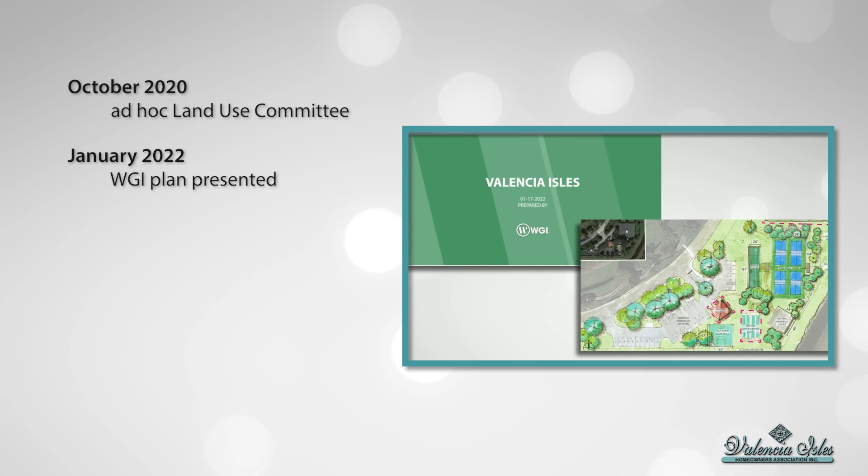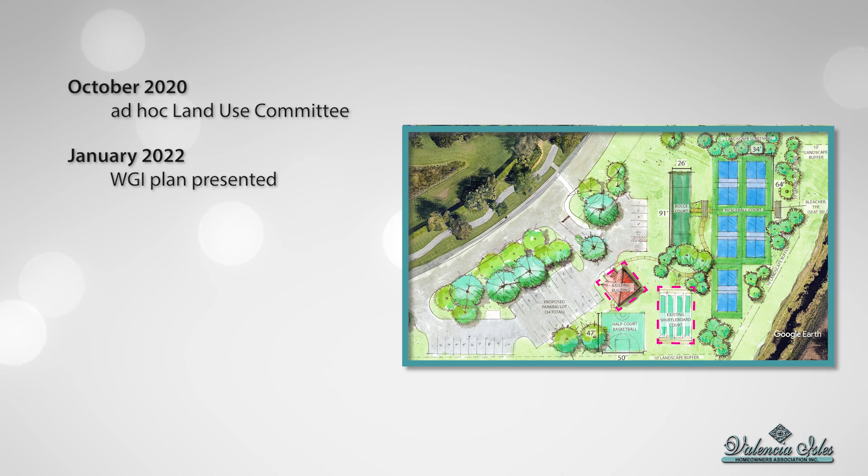It was an ambitious plan that included 6 pickleball courts, 2 bocce courts, a half-court basketball court, additional lighting, and increased parking. The project was estimated to cost no more than $700,000. In April of 2022, the board passed a motion to have our attorneys prepare a community vote on a special assessment of $618,000 to execute the planned conversion. The result of that vote was revealed on December 15, 2022.

536 residents voted, with 275 voting in favor of the special assessment and 261 voting against. So although the majority of residents voted for the project, it did not receive the required 2/3 needed to pass, so the vote failed. After the failed vote, the Land Use Committee reached out to residents to get our feedback and to better understand the objections of the proposed plan and to discuss various alternatives.

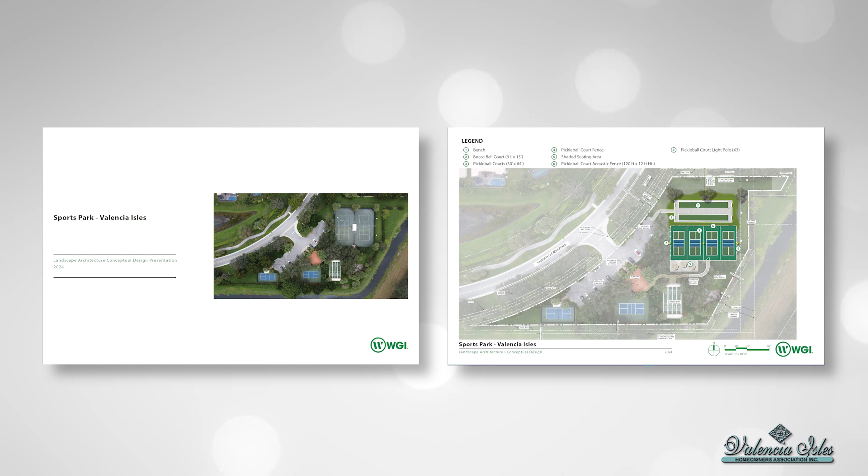Utilizing this information that they received from residents, they went back to WGI for a more modest proposal that hopefully will satisfy some of the concerns residents had with the original plan. And that brings us to today, where the new sports park enhancement plan can be presented to the community.

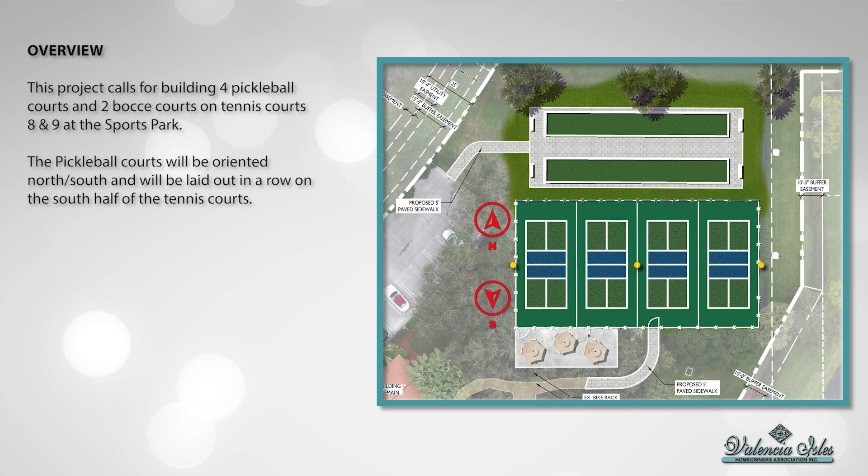Okay, so let's start with an overview. As we said, the project calls for the building of 4 pickleball courts and 2 bocce courts on courts 8 and 9 at the sports park. The pickleball courts will be oriented north-south and will be laid out in a row on the south half of the tennis courts. The bocce courts will be oriented east-west and will be installed on the northern half of the tennis courts. A walkway will be built that leads directly from the north end of the parking lot to the bocce courts.

Pickleball courts will be composed of acrylic and acrylic court paint and playing lines. The courts will be separated by 4-foot-tall fencing. Seating: an area of pavers approximately 50 feet by 20 feet will be installed on the west side of the south fence for a seating area, with round tables with umbrellas and chairs. New lighting will be installed.

10-foot-high fencing will be installed around 3 sides of the pickleball courts, and a 12-foot-high fence with mass-loaded vinyl sound-absorbing material will be installed on the north side of the pickleball courts, which is the side that faces homes on Bali Hai. Sound mitigation: Palm Beach County sound level limit is 55 decibels, and the closest homes on Bali Hai will now be about 140 feet from the pickleball courts.

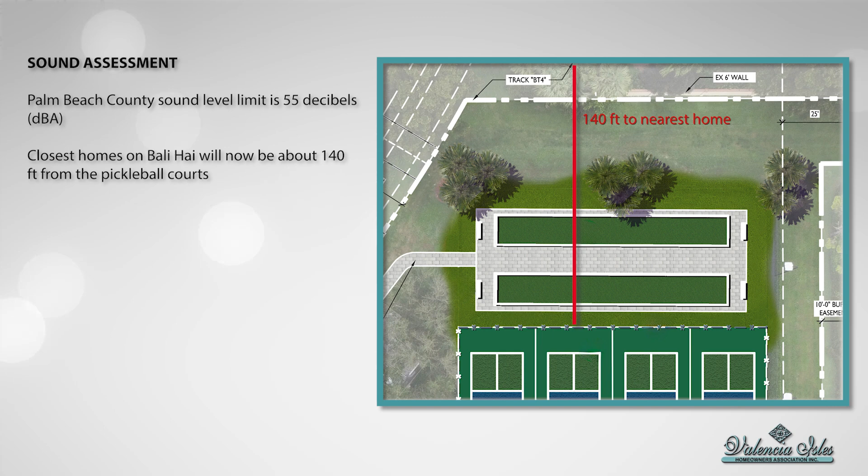PSM, which is the leading company in the field of pickleball sound assessment and sound management, predicted the sound levels to be 48 decibels with a 12-foot fence with sound-absorbing barrier. Their work and findings are based on computer sound modeling. The bocce courts will have artificial turf, which requires less maintenance than Har-Tru. Some communities in the area have courts made of artificial turf and some have courts made of Har-Tru. Either is fine for tournament play.

The size is 13 feet by 91, which is regulation tournament size. The communities in the area either have regulation size courts already, or if they don't, they are converting their courts to 13 by 91. There will be a 2-foot border of pavers installed around the bocce courts. The rest of the area will be filled in with sod. Benches will be installed at each end of the court, same as the shuffleboard courts.

The goal right now is to increase the number of pickleball courts and add bocce courts. Once the courts are built, the board at that time will determine how many additional parking spaces may be needed. Well, I hope you found the video helpful, and I know that in the very near future, the board and the Land Use Committee will be holding presentations where you can submit your questions and have them answered.